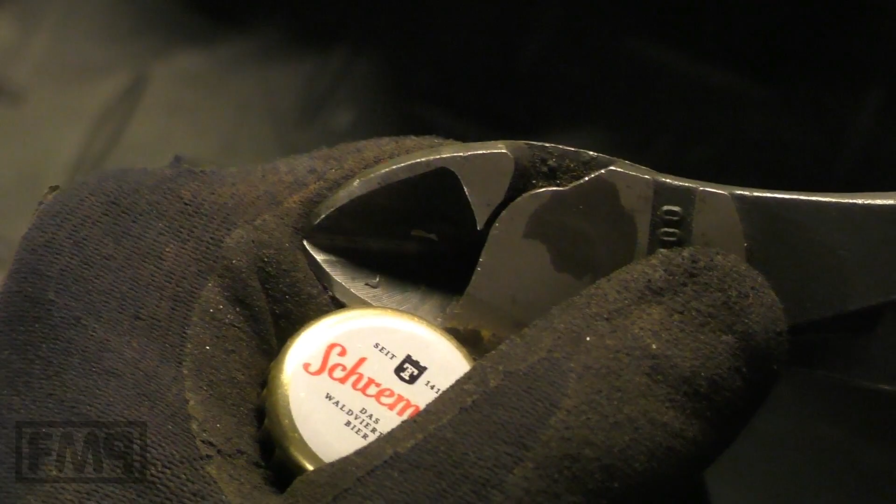Cheers, guys. How's life? Schremser it is. Someone asked the brand. Austrian brewery. Cheers.

Ooh, I like it. I heard a rumor that there is a new Malossi 200. My beer bottle's back. Okay, back to the rumor. No. Tricking here a little bit to get your attention.

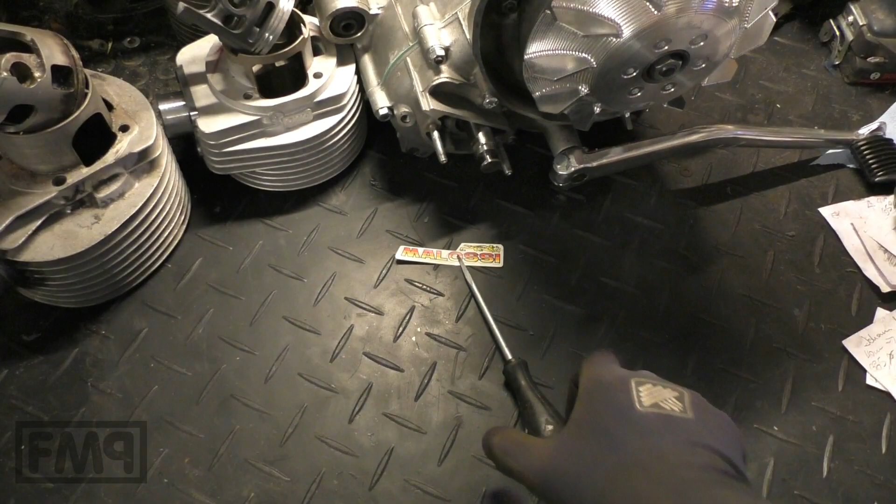What's the recipe to get a 221 Sport touring cylinder? The best rotary valve touring cylinder. You just take a 210 Malossi Sport. That's a 216 version with the Vertex piston. You take a long stroke crank. This is a Tameni

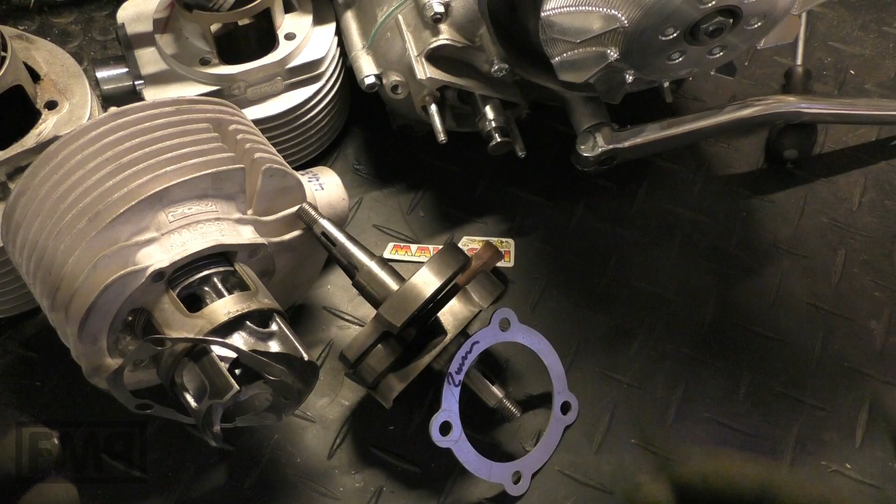and a used one, and you just take a 2mm head gasket together with the standard bottom gasket, and this is it. This is your kit for a 221 Malossi Sport touring cylinder, the best available touring cylinder. If you take a long stroke, look up the guide. I explained how it changes, what kind of gasket you need.

Do use a 2mm gasket. The original cylinder head is fine. The squish is a little bit small. It's between 0.6 and 1mm. This is too little. So better take a 2mm. How to apply this head gasket?

Quite easy. Make sure that you roughen up all surfaces, both sides and the cylinder, and of course the cylinder head. Sandpapering on 420, 400, 320. Then use some at least 300-degree sealing mass, put it all over, and just mount the cylinder head.

Use a torque key, 25 is the value, and just tighten up the head, and it will be tight. No need to get a special cylinder head. Use the original Malossi head, apply a 2mm head gasket, and you're good. What's the power you're gonna get? I'm gonna put 1, 2, 3 dyno curves into the video.

Malossi Sport has plug and play around 16 to 18 horsepower. Plug and play without adjusting any engine case to the transfer ports, 16 to 18. It's quite a lot. And with a long stroke and longer intake timings, you can get 20 to 22.

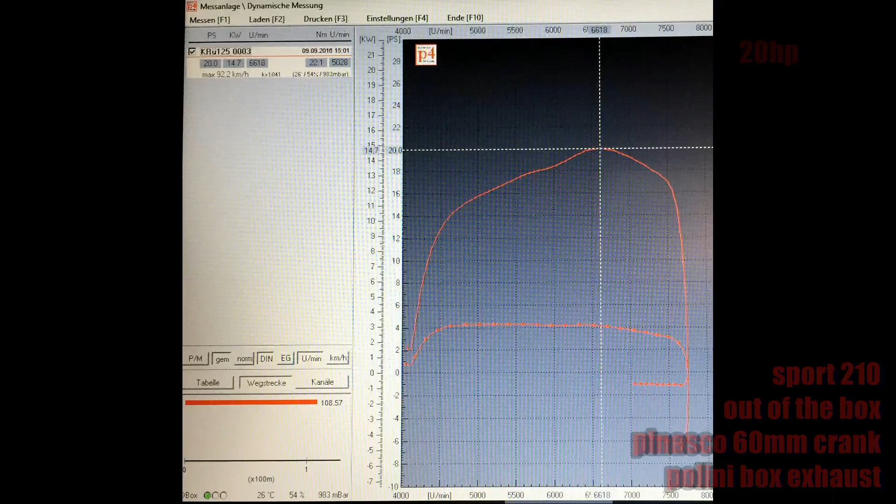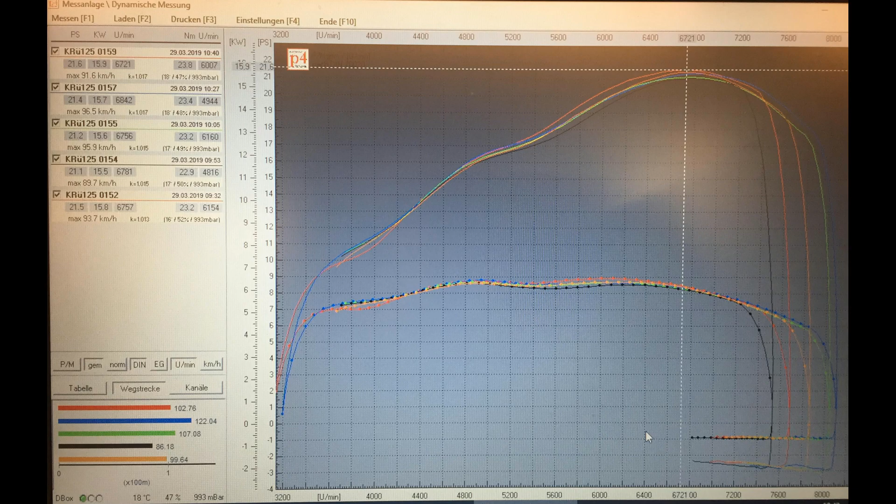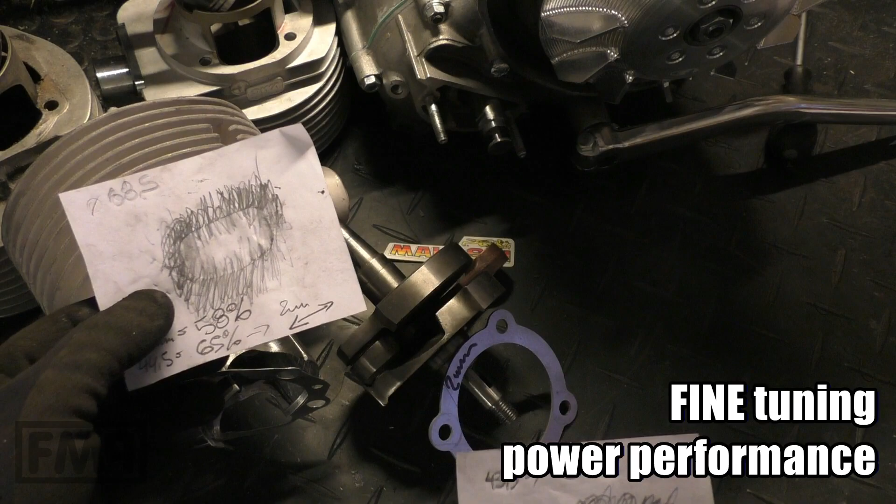And if you go one step further, you can set the cylinder timings in detail, and you can change the exhaust port. Because how about the exhaust port? The original one, 58% standard exhaust port width, sounds pretty small, but you have 16 to 18 horsepower. Just plug and play. And for fine tuning, go for 63 to 65 and you will get quite good power.

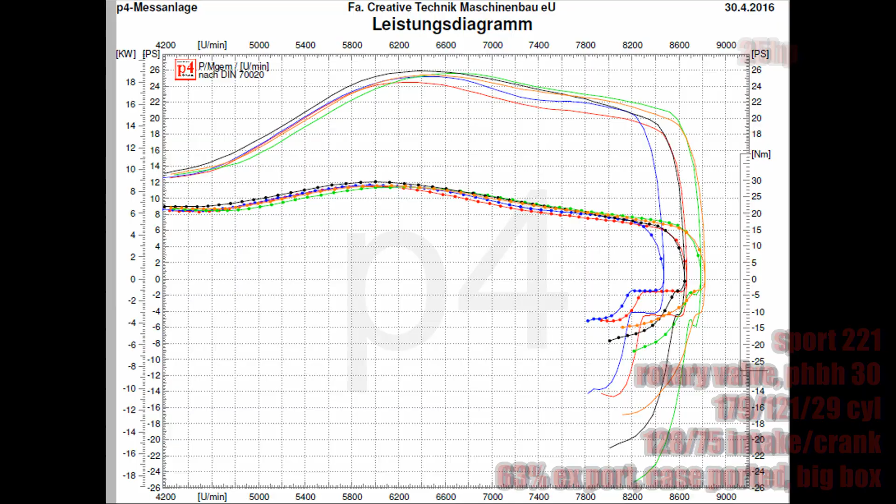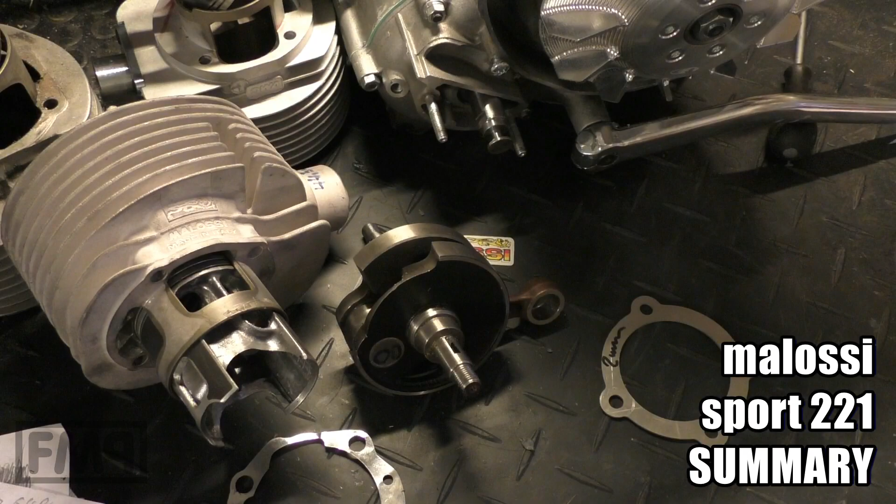What you do, of course, have to ensure is rotary valve distance 0.05. Then you can go to 200-degree intake timing. And of course, ignition has to be healthy, no oil sucker, and so on. This is your Malossi Sport 221 kit.

Long stroke, 2mm head gasket, standard bottom gasket. You don't need to change the exhaust port. For starters, and I'm sure you will be fine with this power, just use the original exhaust port. Wrong one. This one.

And in the end, the Malossi Sport is the better MHR. Why is that? The timings are lower. The exhaust port is smaller, so you can set the timings you want. You can choose the exhaust port width that you want. The Malossi MHR comes with around 125 transfer port and 185 exhaust port, and that is too high for rotary valve and for box exhaust.

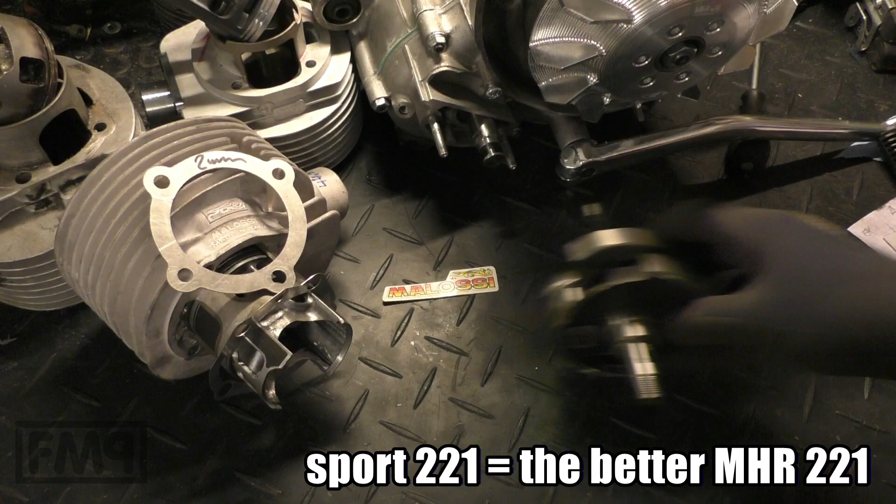Malossi Sport, Malossi MHR. Everybody's buying MHR because it's the top line Malossi, and everybody thinks, oh, if I go for Malossi, then I want to have MHR. Look at this. Come on. High-end power. It's always the question if the cylinder with the timings and the exhaust port fits the setup, the engine you want to make.

And in case of rotary, MHR has too high cylinder timings and the exhaust port is too big. You're better off with a Malossi Sport, originally out of the box, just long stroke and the head gasket, or optimize the exhaust port.

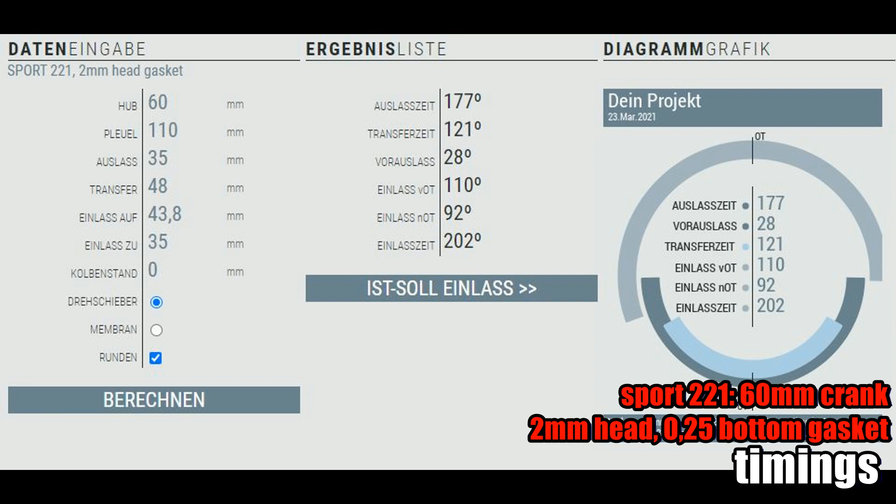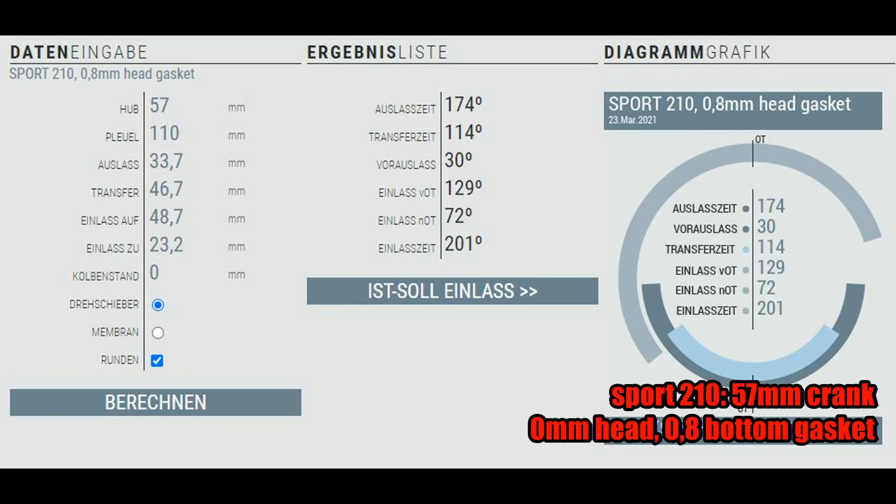The big question. Hey guys, Malossi. Polini it is. It's always Polini. It was. Polini is the best touring cylinder for 200cc. Is that true?